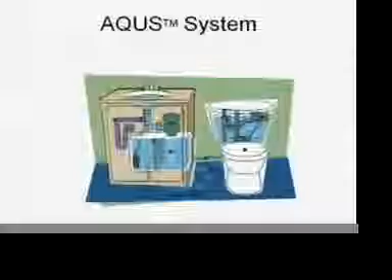So all kind of things. But then don't forget the residential side, the commercial side. Huge amount of use. If you get into Texas, standard downtown office building, multi-story office building, half the water it uses is makeup water for its cooling towers.

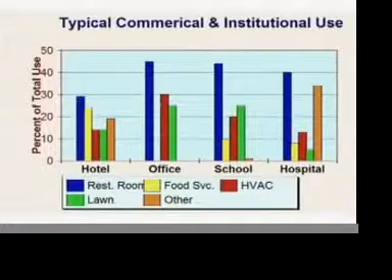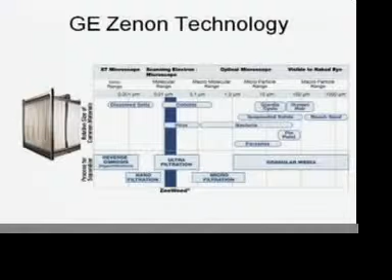Now, the cooling towers are pretty forgiving on the kind of water that you can take in there. They don't like high BOD loadings or organic loadings, but you can handle that, and think of some of your opportunities that you may have there. Also, there are a lot of buildings now that are being designed with whole system reuse systems. This happens to be one. It's a GE Zenon technology that actually uses membrane filtration, reproduces this water, cleans it up to the point where it can be reused for toilet flushing and urinal flushing.

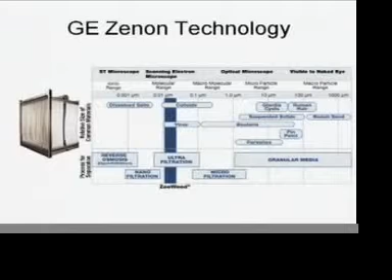If you look at water use inside of a building, average office building, 80 or 90% of the water used in there is used for hand washing and for toilet flushing. And so if you can recycle that water and reuse it again, plus you catch some extra water from the hand washing lavatories, you can reduce water use by 80 or 90% in these buildings. Now, I didn't mention the cooling tower. We're not on that one. This is interior plumbing. And you have to look at a lot of things.

This is the first I'm going to show you here. And what I'm trying to do here is characterize what are some of the problems that you may run into with the different sources of water. Rainwater is typically pretty safe. It's clean water. Depends on what it ran off of. Also, think of your roof. How many squirrels and how many birds, and what do they do on the roof? Do think of that. But you have that all the way down to on-site wastewater treatment plants where you have high sediment loads, high organic loads, high pathogen considerations.

So what is my source of water, and what do I have to do to bring it up to the use that I want? Well, we've been doing on-site wastewater treatment for a long time with something called septic tanks. You know, the grass always does grow greener over the septic tank. And so anytime you're in subsurface systems, there's treatment that needs to be done to remove the solids and the grease and everything, but you can use that fairly safely in a lot of areas. Something different from the standard leach field. You can use the dosing fields and stuff like this. It's been around. Nobody's thought of it as a water reuse type system, though.

And then you get up to all kind of things: air conditioning condensate, pool backwash water. There are cities in the United States right now that are strongly encouraging their citizens to not put swimming pool water down the sanitary sewer. In some places, they even ban it, because they don't want that water in the sewer, they want it some other place. And some other place is usually the yard.

The city of Austin, Texas, actually the Parks and Recreation Department, catches its filter backwash water, runs it into a large hole, and I mean you can stick your finger in it, type distribution system, and uses it for flood irrigation of certain areas that they want to keep green but are not directly used all the time for picnicking and everything like that. So a lot of different things happening in that area. I could go on down with all the different things.

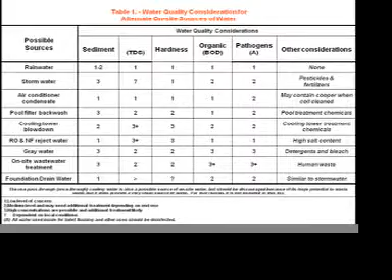If you're going to use it for landscape irrigation, you probably aren't going to need anything on that. That's one example. You get all the way down to using on-site wastewater, and you're going to have to go through all these different methods of treatment to make that water reusable if you're going to use it in any surface type use.

Again, I'll go back. One of the few states I know of that actually has code that allows you to take your wastewater in rural areas and use it for above ground irrigation in the residential setting is the state of Texas. If you look at the Texas Commission on Environmental Quality, it's Rule 285.

But anyway, with that said, always on these systems where you're getting into the potential for problems like that, look at it to see what your local codes are, and the good codes also require some type of regular inspection of these systems where you have the high bacteriological loadings such as the blackwater systems. Enough of that. You can read that chart for yourself.

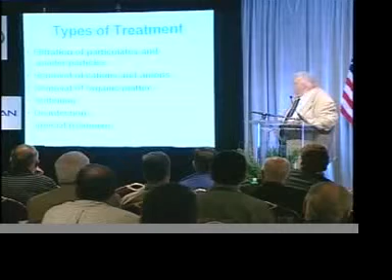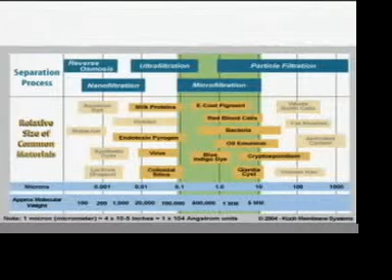Types of treatment, we all know what they are. All kind of different things here. We can do a lot of things. I'm sure a lot of you have seen this diagram somewhere. It appears in almost every place where the people sell reverse osmosis units. But it talks about what to filter out. I'm not trying to get into teaching on this. I'm just saying there are a lot of things to consider when you start walking through these systems.

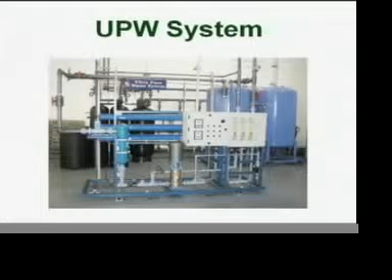You have strainers of all kinds. You have even ultra pure water systems. This system right here takes the waste from a plating outfit and turns that back into ultra pure water. They actually are plating parts for use in the computer industry, and they're doing on-site recycling with that water.

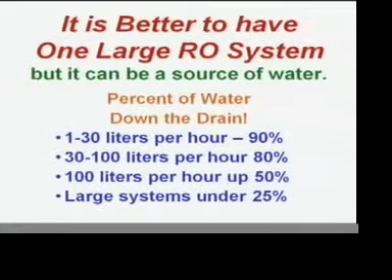If you're putting reverse osmosis units in, first place they could be an excellent source of recycled water, but boy, can they waste the water. How many of you have installed or worked with a small residential RO unit? You know, they can dump 4 or 5 gallons of water down the drain for every one they produce. If you get over and start talking about the microchip industry, they recover 3 gallons for every one they dump. So that just shows you the difference. A lot of different things when you start getting to that.

But I wanted to get into a few of the other things. We're going to talk about rainwater catchment, and I'm going to let Bob talk about this. But for every inch of rainfall, you get 0.63 gallons of water per square foot. Stop and think about that. Add up the square footage of your roof. If you're in a big warehouse, you could run the whole warehouse for a whole year on that water without any problem at all. There are many homes that run on nothing but rainwater, and they are very successful.

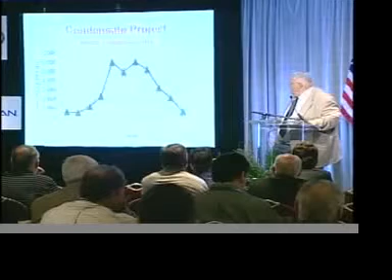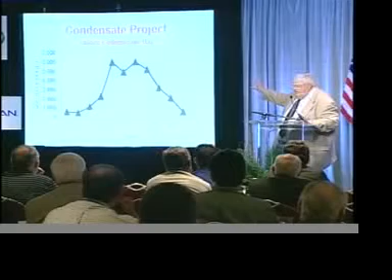AC condensate. Air conditioning condensate is the untapped source out there. In this particular system, this is in gallons per day out of what happened to be a data management center. And look at this, in the middle of the summer, they're getting 5,000 or 6,000 gallons a day of very pure water out of that system.